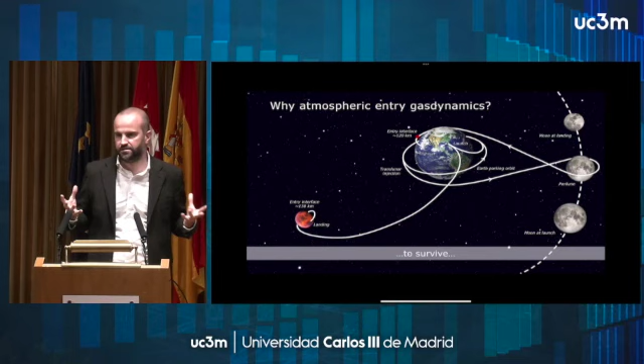This is better. This leads to the fact that we constantly need to validate and assess the quality and the completeness of our answers. Now, why is atmospheric gas dynamics important? Because we want to survive the problem of flying across the atmosphere of a planet, a satellite, or any other object that has an atmosphere.

Here you see we want to go to the moon. Fine, we went there, we want to go back, but then we need to come back to the Earth and be sure that when we are re-entering the Earth's atmosphere, we don't fry the astronauts inside the capsule. But we want to go to Mars. We want to do many more things within our solar system and outside our solar system. And we need to survive all of them.

And if we have an atmosphere to deal with, we have the problem of understanding how to deal with the very high loads that come from very high heat fluxes, very high temperature, a lot of pressure, shock waves, and so on and so forth.

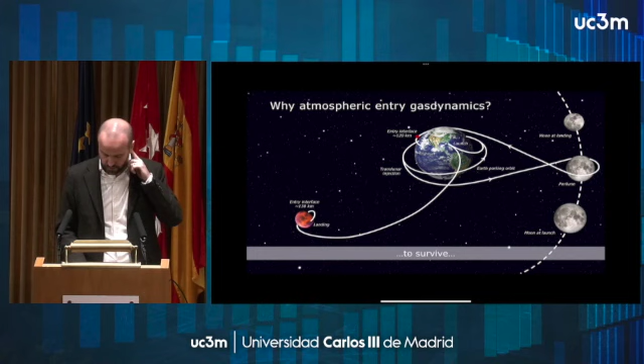But we want to understand it and be better, have better answers, because we want to destroy stuff. So, white and black, right? We want to survive, but we want to destroy stuff.

And this is what we have to do, or one way that we can look at the fact that we have a lot of space junk around our Earth, our planet, and one way of getting rid of those and ensure the sustainable use of space is to make sure that we have a way to get rid of satellites, spacecraft, fragments of satellites or other objects that we have sent out in outer space or in orbit when they reach their end of life.

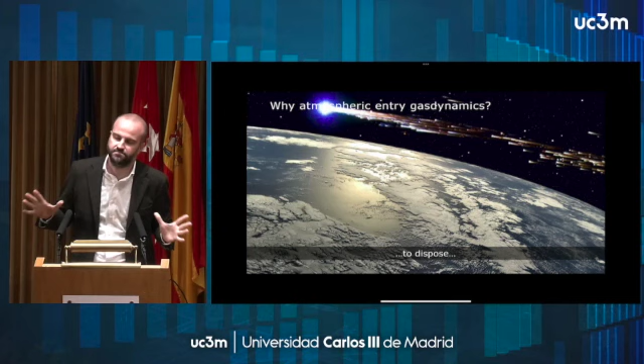And destructive atmospheric re-entry is a way of doing it. So it's a way of picking up a satellite that no longer works, make it re-enter in Earth's atmosphere, and ensure now that the heat fluxes, the pressure loads, and anything that goes on is enough to destroy. Because we don't want fragments hitting the ground, possibly hitting people, and having unpleasant consequences. So that is the why.

But what is what? So what is atmospheric entry gas dynamics? So this is a topic that has been studied for many years, many decades, by many people, many researchers and scientists. And I am not here just to say, this is what it is.

What I want to do here within this seminar is just to, first of all, agree on a little bit of the terminology, the words, the jargon that we're going to use, such that we can understand each other, and to touch some elements of atmospheric planetary entry gas dynamics that are relevant for the type of research that we do in Strathclyde, with the European Space Agency, with other collaborators.

So, I have taken the liberty, which again, it's not a rigorous definition, it's not a theorem, but I've taken the liberty to characterize or to give my answer to what is atmospheric entry gas dynamics as a discipline that has to deal with high temperature, high Mach, non-equilibrium flow physics.

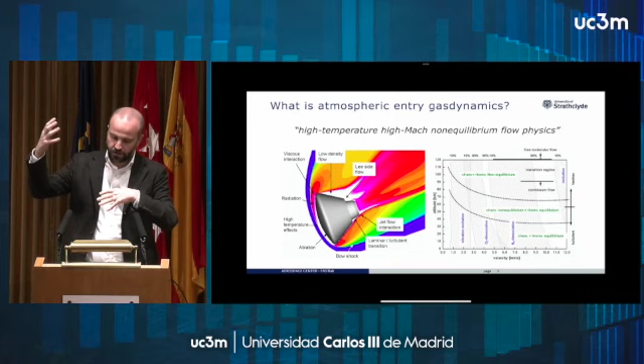So it's high temperature because when an object is re-entering on Earth and is now flying at very high speed, very high Mach number. Now Mach number is not speed, they're not the same thing, okay? There is the temperature, the speed of sound between, but again, let's try not to be too picky and too theoretical now.

The very high Mach and the very high speed triggers a number of aerodynamic effects that induce a lot of aerodynamic drag on the vehicle, and as a consequence of this, there are very steep gradients of a number of quantities, but especially temperature. And so if you go very close to the surface of the object, you have a very high temperature, orders of thousands of Kelvin, okay?

It's high Mach because, again, if we want to re-enter from a planetary trajectory, if we are re-entering from the Moon, if we are re-entering from Mars, we are typically flying very fast. Very fast because, well, you need to go outside very fast, but also because as you approach the Earth, the gravitational pull is accelerating the object. And you want to be sure that that acceleration is not doing you more harm than good.

And it is non-equilibrium. Non-equilibrium for various different reasons, but I would like to mention two, and I will explore more one of the two. There is non-equilibrium because when we are flying in the higher layers of the atmosphere, the density of the gas that is making the atmosphere is low. Or better, the number density, which is the number of particles, of molecules per unit volume, tends to be very low.

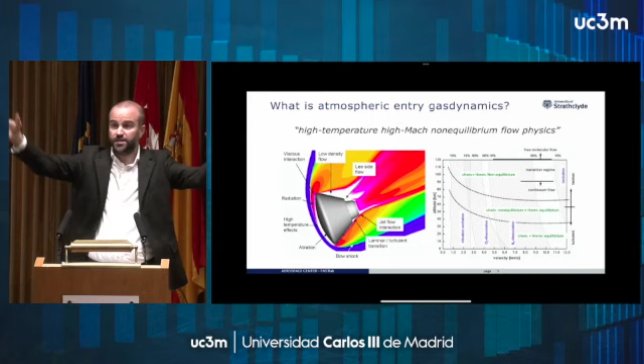Electrons are split away, and you have positive ions, you have electrons, you have plasma, you have MHD, magnetohydrodynamics, magneto-gas dynamics, because then you have electrons moving around your vehicle, and that induces currents, magnetic fields, and that is another very complicated, very multidisciplinary problem.

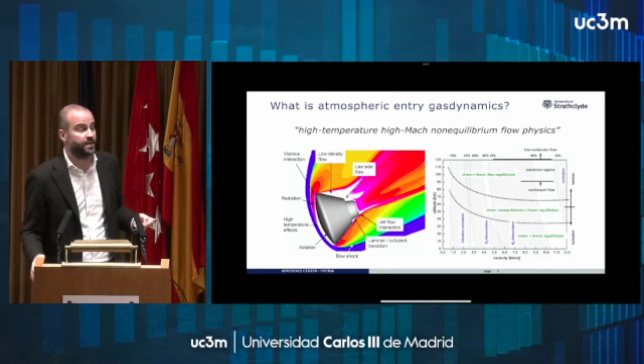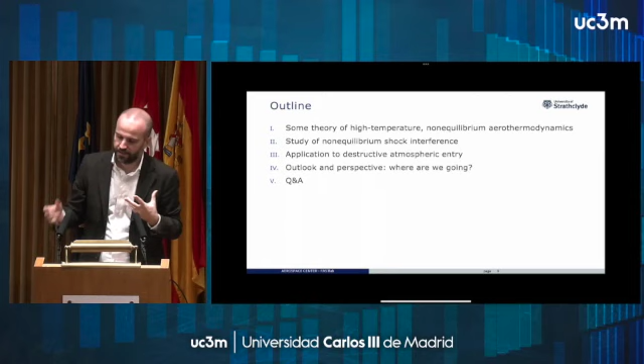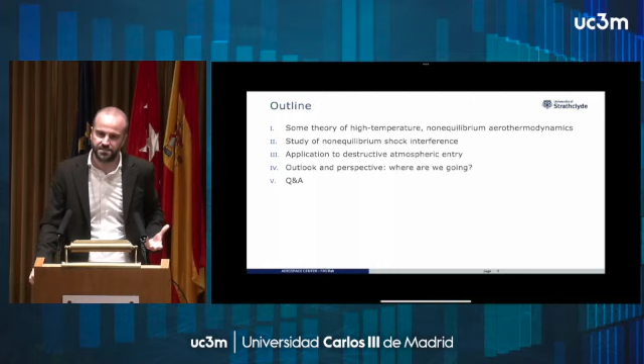And then I will go with part 2 and part 3, looking at two, I would call them applications, but let's say areas where we are studying, in one case, some fundamental problems, shock interference patterns, and in the other case, a little bit more an applied problem, even if that's, again, a terminology, that is destructive atmospheric reentry. And then I will close with a little bit of perspective: where we are going, what are the scientists in the world doing, what are the most important questions that we need to ask now, or is there any question that has an answer, but that answer needs to be improved, needs to be corrected, completed.

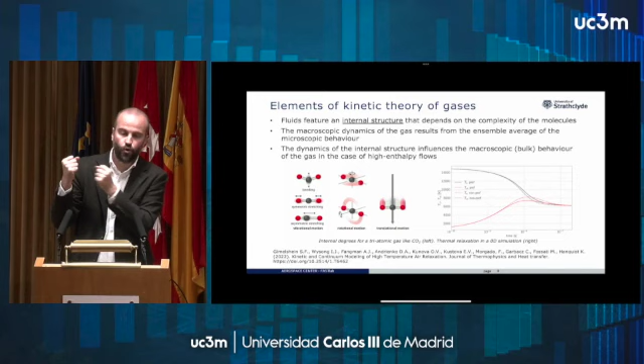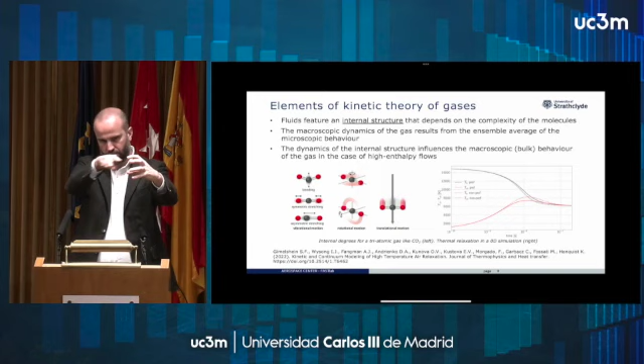So let's start with part one. And I would like to start with bringing your attention to the fact that when it comes to gas dynamics, and gas dynamics in these conditions that we've been dealing with, we cannot neglect the fact that the molecules have a structure. And if you have a molecule with two atoms, O2, molecular oxygen, well, the way energy can be stored in this molecule is different than the way that energy can be stored in an atom of argon, for example. Because we have two atoms of oxygen, one chemical bond, and therefore this object can rotate, okay, but can also vibrate.

And so this idea of having an internal structure of the molecules is what leads to the fact that, when it comes to the internal energy that the thermodynamics books keep telling us about, that internal energy is not only a translational energy of a particle. That works if you are dealing with less complex flows, and each molecule of the gas is a billiard ball, and then you can treat the internal energy just as its translational energy.

But in reality, due to the high energy levels involved in atmospheric reentry, when two molecules collide, that energy has to go somewhere, and it doesn't go only into an exchange of translational energy, exchange of momentum. It goes into vibrational energy. So the molecule starts vibrating as if there was a spring between the two atoms, and it starts rotating. And there is also the fact that we have electrons that make these bonds, and, if we have more complex molecules, surround the atoms with orbitals, and so on and so forth.

And the energy level at which these electrons find themselves depends on the energy that is involved in the collision. And so electrons can change their energy level if the collision is sufficiently energetic. And that's why we need to account for these mechanisms if we want to have a good and accurate prediction of what is happening. And I will show an example of why this is important. What is the difference?

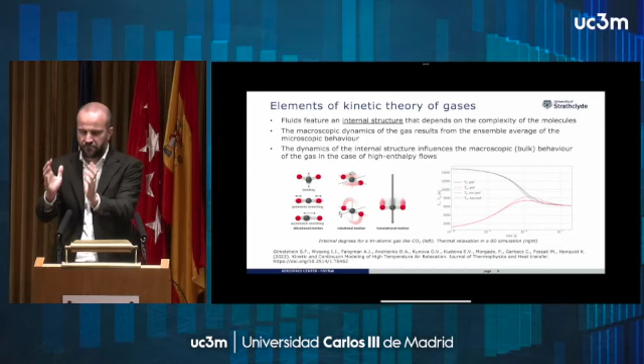What we do to pass from this world, which is the microscopic world, where we have a super focused telescope that looks at the various particles, to the macroscopic world, that is what we feel, because we have a certain dimension, right? Is a bunch of integrations. Now, I'm making it very simple, right? But the point is, you can describe the kinetics of these molecules, the dynamics of these molecules, and then the way you go from there to the macroscopic world, so the classic Navier-Stokes equation, is by making a lot of integrals, complicated integrals of these microscopic quantities. But at the end of the day, this is what you have, okay?

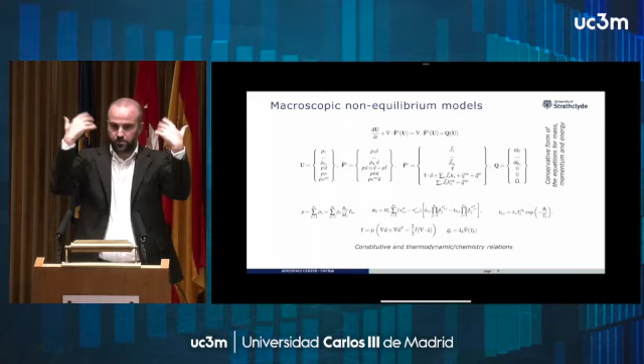And it is very important that we take into account this chemistry, because if you don't, all the energy that would have gone into breaking the various chemical bonds would have been revealed as sensible energy, so as temperature in the gas flow. This means that if we were to simulate the re-entry of the Apollo capsule from the moon without accounting for those, you would have temperatures that are incredibly high, tens and tens of thousands of Kelvin, which is not realistic and would be very difficult to face with the materials that we have now, unless we do something very heavy. That doesn't work as well.

At the bottom part, you have the thermodynamic equations that are needed to complete the set of equations, balance between unknowns and equations. So you have the thermal equation of state for pressure, Dalton's law. Then you have the definition of the source terms. Again, that's chemistry: production, destruction, species, stoichiometric coefficients going on there. Constants of reaction at the very right-hand side.

Arrhenius law is typically what we use, but with Tc, a characteristic temperature that now has to deal with the fact that we have two energies, two temperatures. And so there are functions there. And then below, the classic equations for shear stress and the heat flux for each one of the energies that we have.

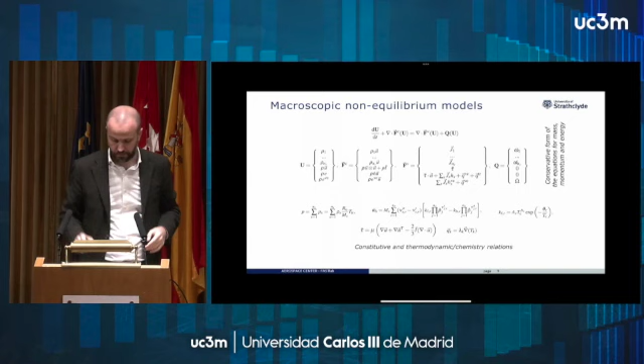Before a certain amount of energy actually goes into vibration, we need to reach a certain level of energy. So if you do not have collisions that are sufficiently energetic, your molecule will not vibrate. And so you can go back to your billiard ball model, because now what matters is kinetic energy, translational energy of your molecules, because the collisions are mild, and the stiffness of the spring in your idealized harmonic oscillator model is too strong, so it really doesn't move. There's no appreciable energy there.

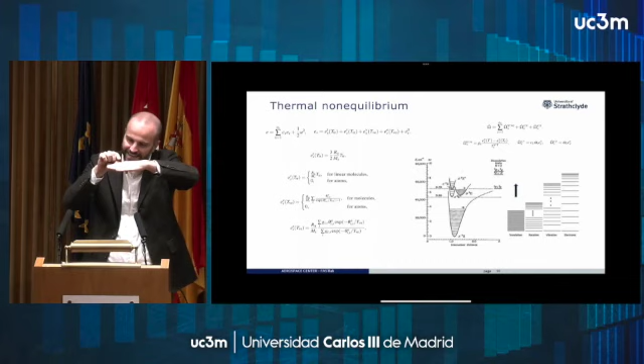So there is a sequence of events, and that is why we tend to go with a two-temperature model, because we say, look, translational and rotational tend to reach equilibrium very fast. You see, all those energy levels are very close, so there is the need of a very small amount of energy to go from one level to another, and that reaches equilibrium relatively fast.

That is not what happens, for example, with vibration. You need to go with much higher levels of energy. And if you don't get the right packet of energy, you don't go there, okay? And this is an important aspect that I will use later on.

Questions? Maybe I don't know if there are questions now. Okay, so that's the theory done, so you can relax. Now it's just colorful images. And we can go ahead with this.

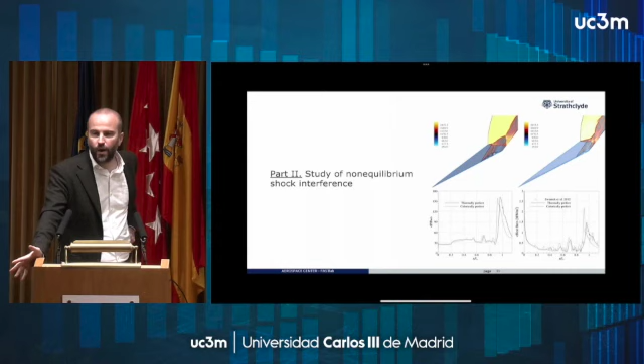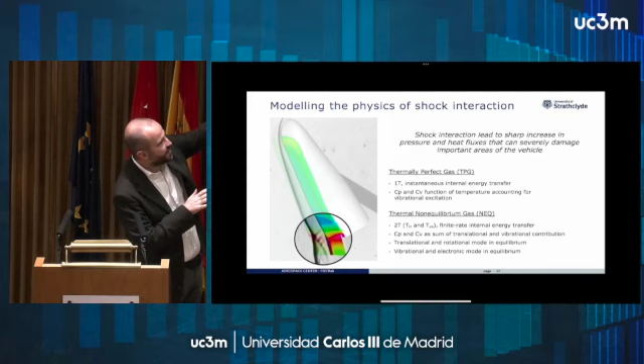So the first thing I want to show you is some work that we have been doing in trying to define the way shock waves interact in non-equilibrium conditions. Why is this important? That's one example, one of the many, because you might have somewhere locally in your re-entering object the presence of multiple shock waves, maybe some generated by the nose, some other generated by a control surface that is now activated and deflected and so on.

And the outcome of this mechanism of interaction is important to be understood well. First of all, because it's important we understand things, that we advance knowledge. But it is also important because you don't want to have an increase in pressure or an increase in heat flux so high that will destroy your control surface. If you destroy your control surface, if you destroy your thermal protection system, your astronauts will become Kentucky Fried Chicken. You don't want that.

Okay? And here I have made the statement about two different models that we may want to consider. The one at the bottom is what I have been annoying you with before: two-temperature model, multi-species, finite rate chemistry, and so on. The one above is, I would say, the most immediate step after the classical Navier-Stokes equations. And let me open and close a parenthesis here.

Whenever I talk about Navier-Stokes equations, I intend mass, momentum, and total energy per unit volume conservation. There are people out there, and I'm not saying it's right or wrong, I'm saying that's the language I use, who say Navier-Stokes is just momentum, because they think it's incompressible, so mass is an incompressibility constraint, there's no thermodynamics, and we just deal with momentum. Okay, fair enough. I talk about Navier-Stokes as the full set of 5 equations in classical fluid mechanics, which is incompletely parabolic for those who like mathematics. But we can talk about this later on.

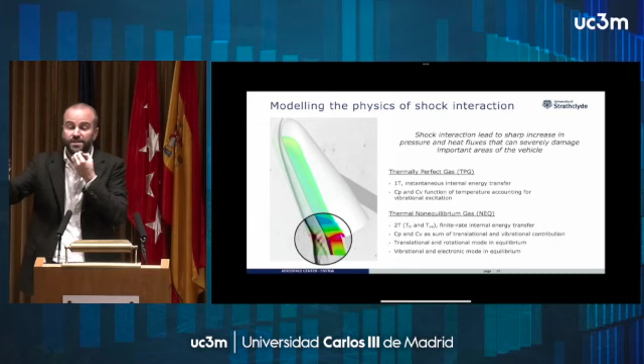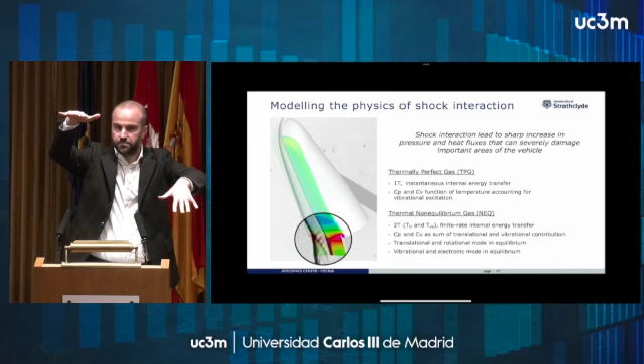And this is a first approach you can use to introduce the fact that the molecules have an internal structure, because the change in CP is a consequence of the activation of the internal degrees of freedom. So you are populating vibrational modes, electronic modes, and so on, in a way that is in equilibrium with respect to the translational and rotational ones. And what we want to do is essentially this: we want to be able to define a schematic for the different types of interaction between shock waves.

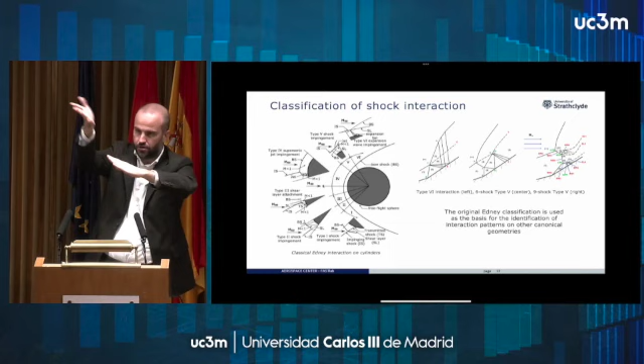Everything started in the 1960s with a guy called Edney, who studied the interaction of an oblique shock with a bow shock in front of a cylinder, and noticed that if I change the location at which the oblique straight shock interferes with the curved shock before the cylinder, the outcome of this interaction is very different. And he found out 6 different types of interaction.

Some of them are more simple than others, but the ingredients are that you have shock waves, you have shear layers, so layers of fluid that move with different velocity, and there is a shear. There are contact discontinuities that are the ideal counterpart of shear layers. There are rarefaction waves, there are supersonic jets, and so on. And from that seminal work, people have applied that to double wedges and other configurations, such as double cones, and that's what we want to do.

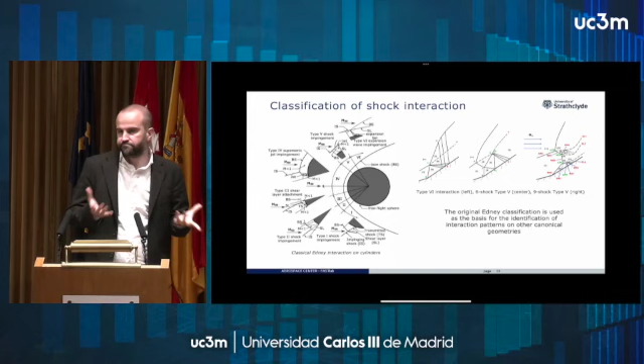We want to be able to identify schematics like those that you see at the top right for a wide range of different types of interaction. And what we did was to focus on CO2. Why? Well, because it's cool. Because it is the main constituent of the atmosphere of Mars.

So Elon Musk should write us a check for this, but he doesn't.

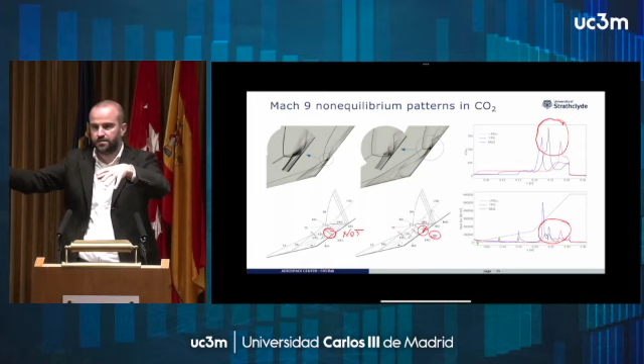In the thermally perfect gas, there is no concept of translational and rotational getting to equilibrium before the vibrational one. So when we have a shock wave and we have a thermally perfect gas, all the energy is immediately converted and equally distributed throughout the entire internal modes. That's not what happens in the case of a non-equilibrium model, because you have first energy going into the translational and rotational modes, and then after a relaxation process, you hit the vibrational one.

What does that mean in practical terms? You have a shock wave that you don't have in the thermally perfect gas or in the perfect ideal gas. You have different peaks in pressure and heat fluxes. And so if you look at the black line on the rightmost side, the non-equilibrium gives you the highest peak in pressure, and the shock wave I'm talking about is responsible for this jump here that is not present in the other two.

And what you see, interestingly enough, and hopefully likely, is that the peak of heat flux is much smaller than the one you will have with the thermally perfect gas. So if you were to design a spacecraft and use a thermally perfect gas model, you would have to make your thermal protection system much thicker.

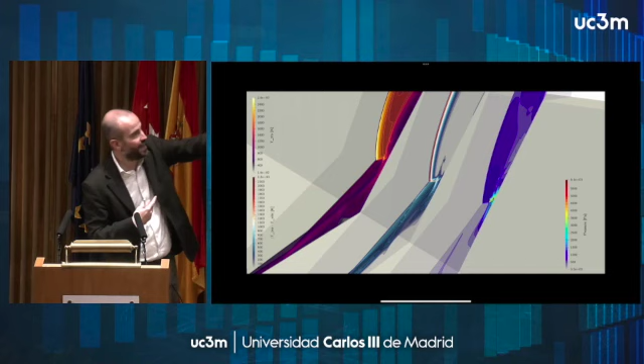This is a colorful image just to show you the level of non-equilibrium you have in this type of flows. The leftmost slice is translational temperature. The center slice is the non-equilibrium effect, translational temperature minus vibrational temperature. Wherever there is no color, there is equilibrium. Wherever you see colors, there's non-equilibrium. And the one at the right is just pressure, because we like pressure. You can see that for this type of flows, there is a lot of non-equilibrium going on that you will not be able to reveal with a thermally perfect gas model.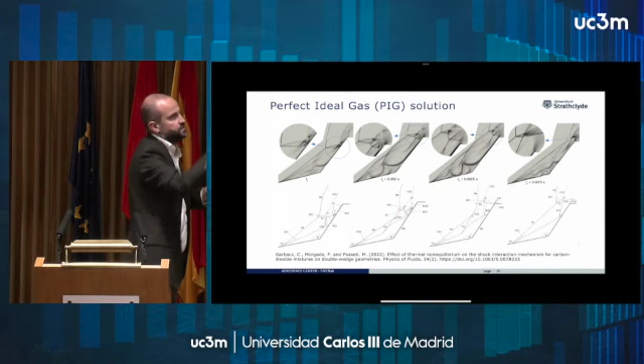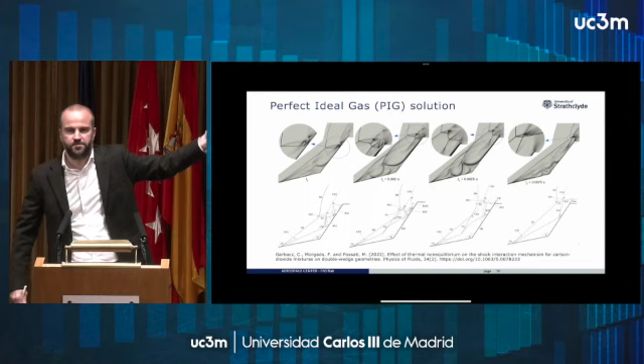I will go very quickly here. This is what you would have if you were to use a perfect ideal gas model, billiard balls, constant CP, constant CV. You would have an unsteady flow, while in the previous cases the interaction was steady state. In this case, the interaction of the shock wave gives rise to a very large separation bubble, with shock waves moving back and forth, vortices moving, and one may say, well, this is a very interesting, very important mechanism, except that it's wrong. So you can use it just to show colorful images, but don't use it to do any design or any study.

So these are the key findings that we have observed when using this non-equilibrium model with CO2 mixtures. And again, go back to the fact that we are now interpreting correctly the mechanism of energy exchange with a molecule that is CO2, so it's a triatomic molecule. So it's a little bit more complicated than what we saw before. I will not read it, but I will just leave it there for you to have a quick look, and we can chat about it later on.

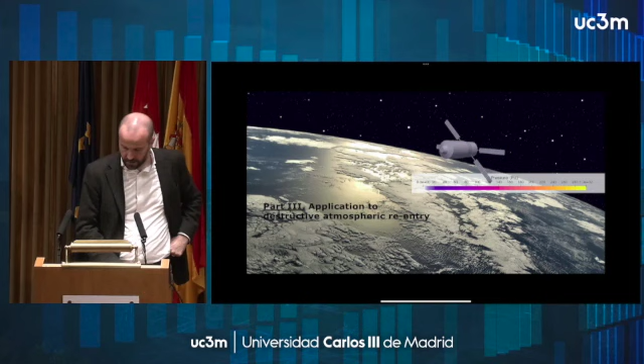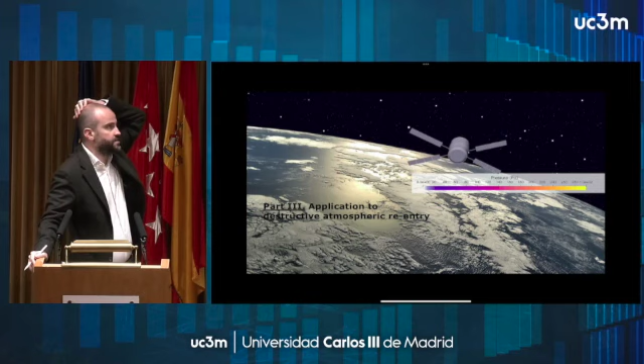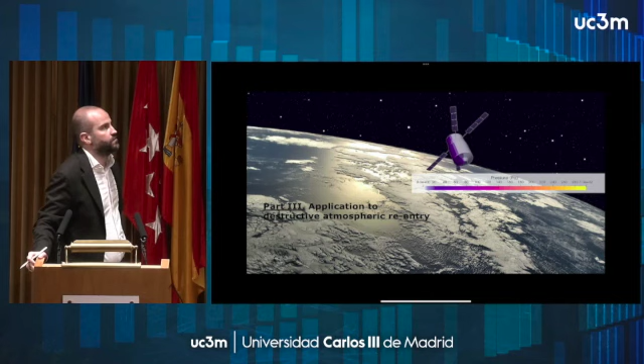This is the second application I want to show you. Now here, differently from what we've done in the other case, the interest of people that work with me is at this stage developing methods. Okay, so we are developing a computational framework to simulate the destructive atmospheric re-entry of a satellite. And the simulation that you see there is a real one that we did.

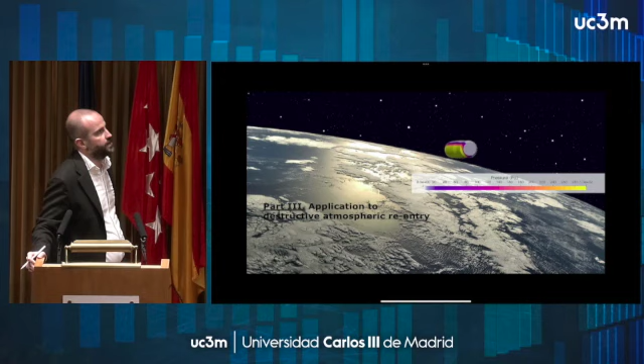Solar panels are gone, and then you let it go for a little while, and you'll see that the cap will go away, because now the pressure and the heat fluxes are destroying a number of things. So how did we get there? We get there by starting from the problem that this is, as I was mentioning before, a very challenging task.

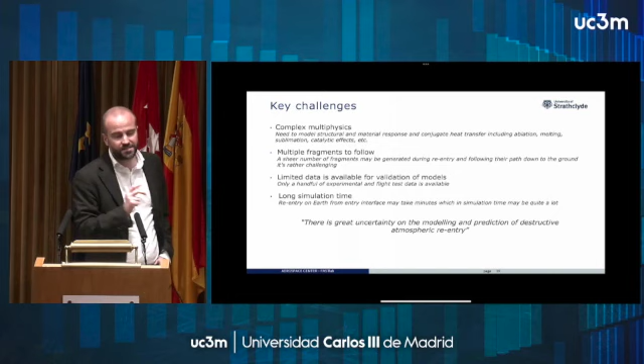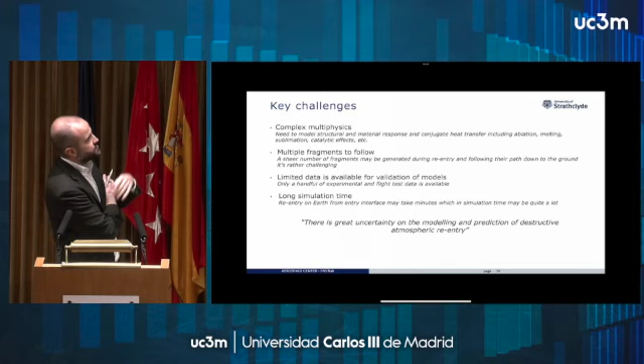It's multi-physics, there are many disciplines, the time scales that are involved in this process are very wide, and so there's a broad range of problems that we need to address. The simulation time tends to be very long. If you want to have a good degree of accuracy, you need to go with high fidelity, and running all those high fidelity simulations takes time.

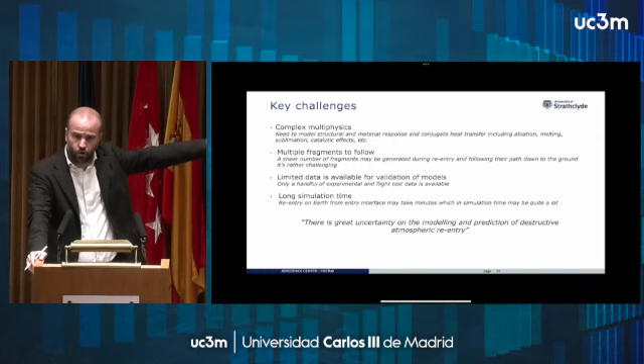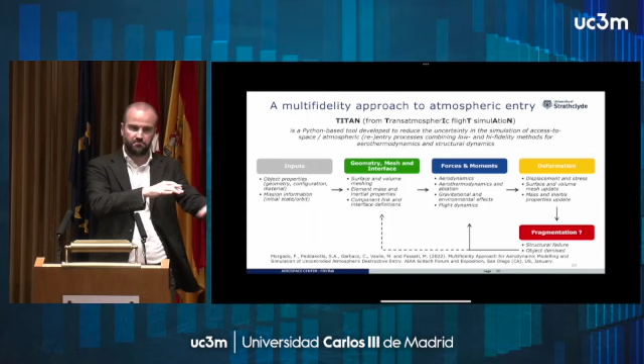And so our approach here has been to try to reduce the uncertainty that goes with this type of simulations, with the aim of improving our ability to say, look, if this object is re-entering, you have to be worried about that specific area down on Earth, because that is where the fragments will go, by developing a multi-fidelity approach that brings together low fidelity, fast, but less accurate models with high fidelity, very accurate, but a little bit costly, in simulating everything that is going on.

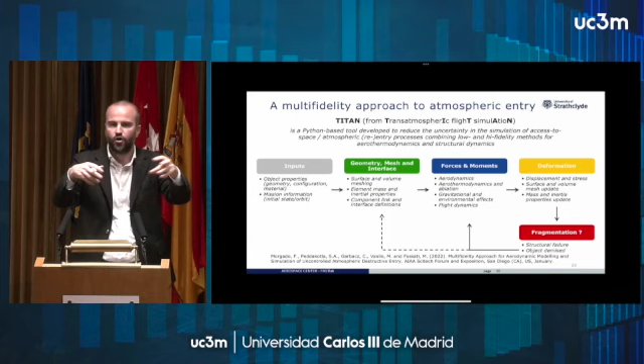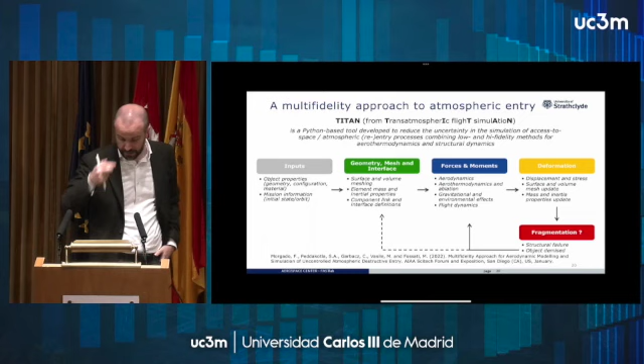From the aerodynamic forces and moments, the aerothermodynamically induced heat fluxes and plasma, to the structural part of things, so how the object deforms and eventually breaks, up to the point where we are following the dynamics with 6 DOF, so we have 6 equations for the dynamics, Newton's forces, moments, accelerations, moments of inertia, and so on. So we have a tool that is called Titan. It will be released open source very soon, so stay tuned.

But what I want to do is to give you a little bit of a flow chart about the aerothermodynamic part, because my background is aerodynamics, right? So I don't do structures, I don't know what they are and how they work. But this is a little bit the way the code is organized.

And if we look at the high fidelity part, there is also the aspect of dealing with the computational mesh, with the need of refining the mesh to improve as much as possible our accuracy without spending too much time simulating over very refined meshes everywhere. And here we are trying to go ahead with the open source mantra, right? So we are trying to use everything open source to make it something useful for the community.

We are using a code called SU2-NEMO. We have been developing it together with the friends at Stanford and VKI and Arizona for the continuum and slip regime, so lower layers of the atmosphere. But when we want to look at the higher layers of the atmosphere, when the rarefied regime is a little bit more intense, we go with a code called SPARTA. It's by Sandia Laboratory. All of this is brought together with some tools to do the structural mechanics. FEniCS, it's another open source tool, and all is integrated together and works.

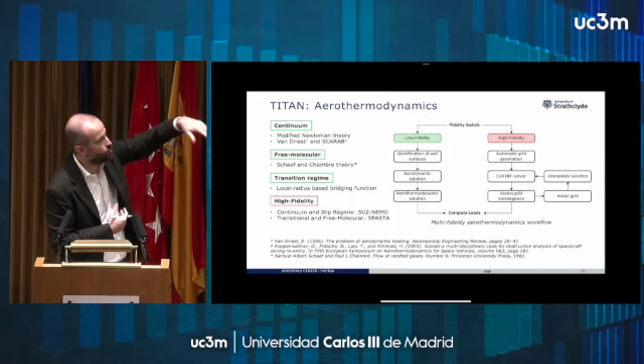So what I want to do here is just to show you how much difference there might be in going from one method, low fidelity, to another one, multi-fidelity. This specific case is a real case, right? So this is an ATV cargo, a real European Space Agency vehicle. This is a simplified geometry just for the sake of a proof of concept.

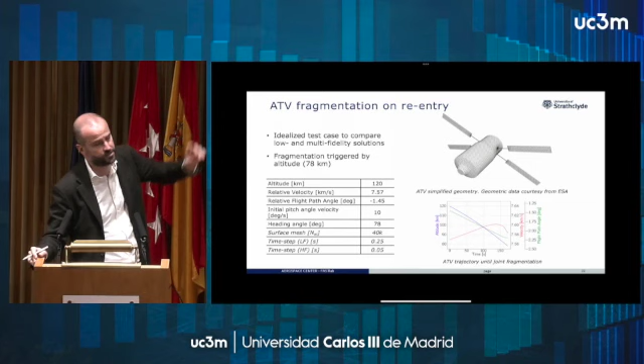These are some of the conditions that we have, and here on the right you see a little bit the trajectory of the main tank, the main cylinder that you see there. So what we did is, okay, this is not going to show very nicely here, but I will try to make some notes here.

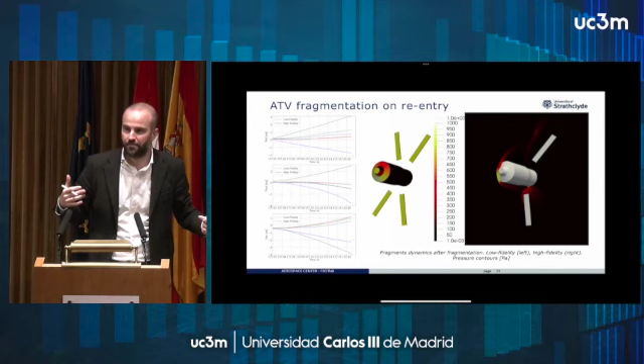So the central animation shows you the fragmentation of the panels with a low fidelity method. Approximate method, very fast, you can get solutions in seconds, if not minutes. The right one is the exact same conditions, but with high fidelity. You see immediately with your naked eye the difference in the dynamics of the solar panels. And that is going to be massive if we now consider many more fragments, the possibility that they collide and that they go and change the overall trajectory.

Here, those, I guess now not very clear graphs show the differences in the attitude, so roll, pitch, and yaw of each one of the panels between low fidelity and high fidelity. Now, I know this is very difficult to read. Probably I could share the presentation and this will be more clear with everyone.

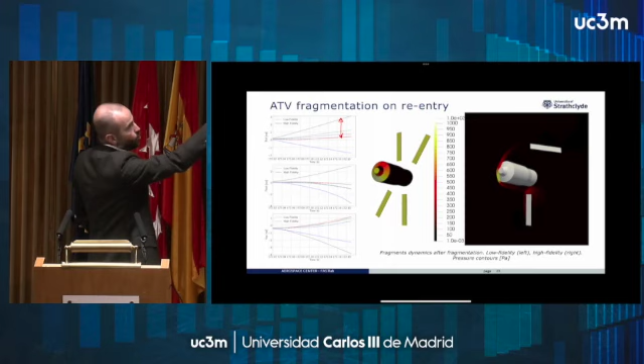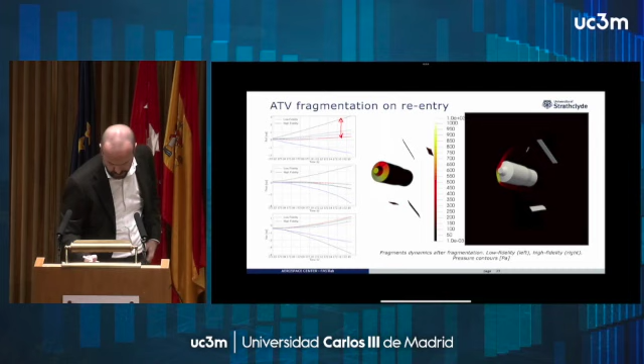But for example, if you look at this arrow here, this is the delta in terms of radians between the rotation around the roll axis of the solar panel between low and high fidelity. Okay, and there are differences that are similar in the other cases. So now, if my eyes don't fail me, you go approximately from 2.5 close to 0, so 2.5 radians, which is not that negligible.

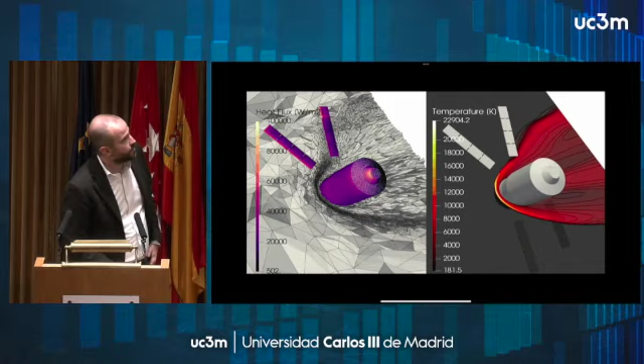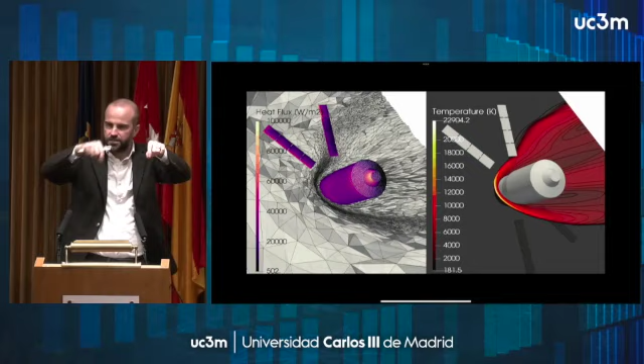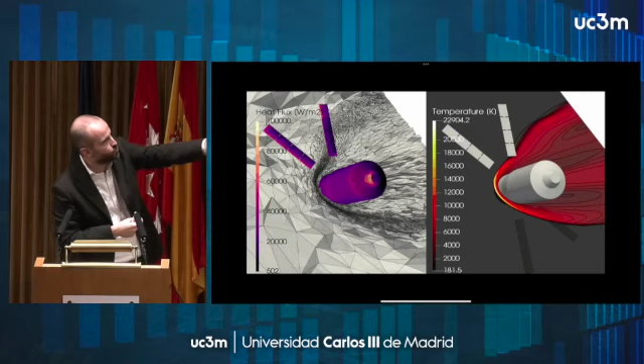Of course, everybody would like to go and do high fidelity simulation like this one. So this is the same object now with a more detailed structure of the solar panels. We have solar arrays with joints that connect them, made with their own material. And you can see here an example of the importance of using mesh adaptation, right? Because that will allow you to reveal and capture the shock wave that is generated near the body and that will impinge on the solar panels, being the major reason for the solar panels to bend and break away.

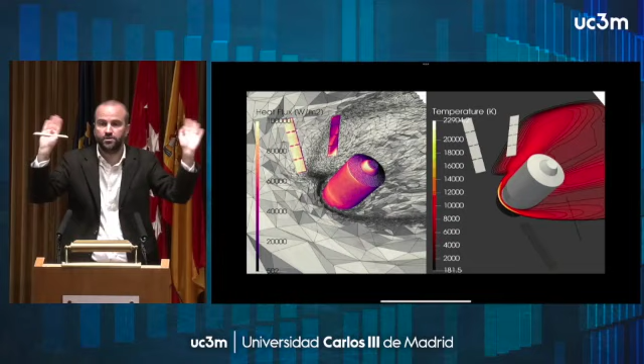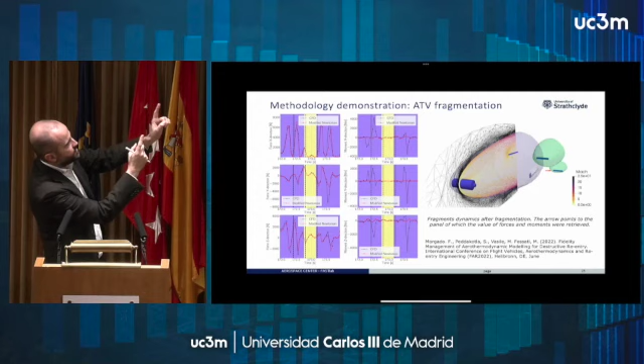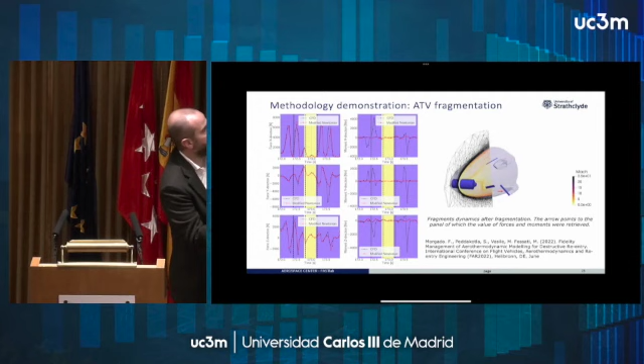Here is the multi-fidelity result. Okay, so what you see here is a number of lines that look at the forces acting on the various fragments that you see there being broken. And what you see in terms of comparison between the purple line and the yellow area is that some of them are done low fidelity, the other one is done high fidelity. So you see that the purple one is low fidelity, the yellow one is high fidelity. And you could see the discrepancies between the low fidelity and the high fidelity solutions, forces and moments, by comparing the lines.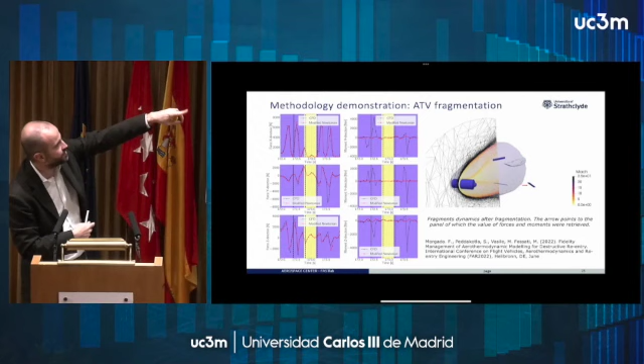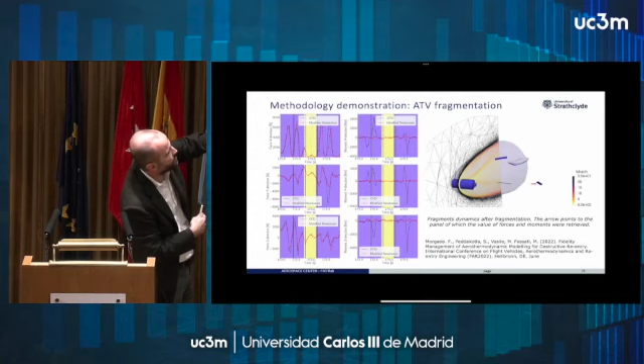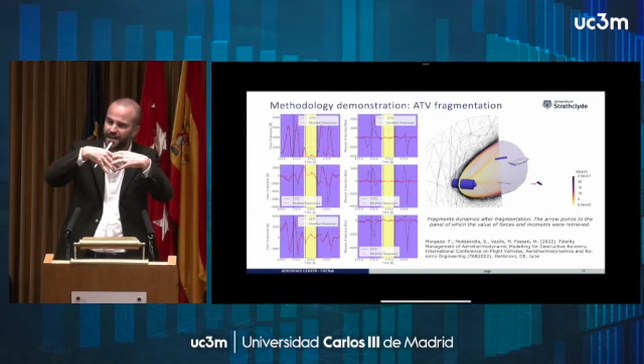And what you observe here is that, of course, when you are in the high fidelity, there is only one line, that is just the CFD one. It's okay, it's fine. But when you go outside, you can see that there are substantial discrepancies. And these discrepancies arise when the objects are complex and there is shock wave interaction between the self-generated shock wave and the solar panels. But when an object goes away alone, and therefore doesn't feel anymore the influence of the other shock waves, then these plots show you that low fidelity methods are not that bad. And so the forces and moments are quite okay. But there has to be no interference within the shock wave.

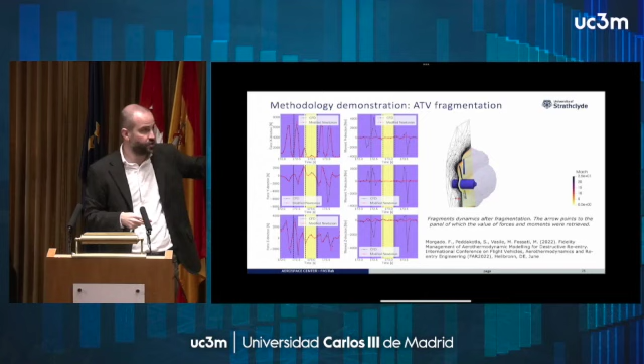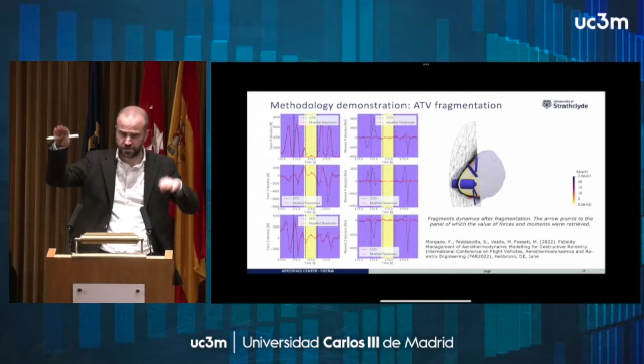And so this multi-fidelity approach is capable of automatically identifying the existence of such an interaction. And if such an interaction exists, then you go with high fidelity. Wherever you see the colored mesh and so on, that's high fidelity, because there is the interaction between the main body, the solar panel in the back, and so on. But whenever something goes away and is now alone, by itself, then you can go ahead with low fidelity, and that works relatively okay. Of course, it's a trade-off, right? You would like to go always with high fidelity, but you can't. So you have to find a compromise.

So, final part, am I right with timing or late?

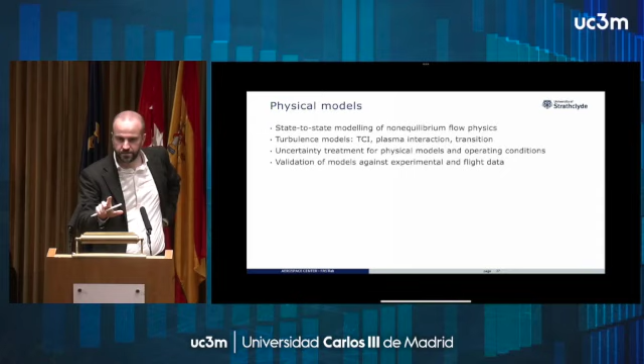It should be, okay. Okay, so this outlook and perspective is split into 3 categories: physical models, numerical models, applications, okay? So this is a list of what are, right now, as we speak, the most hot topics in the physical modeling part. I don't want to talk about turbulence.

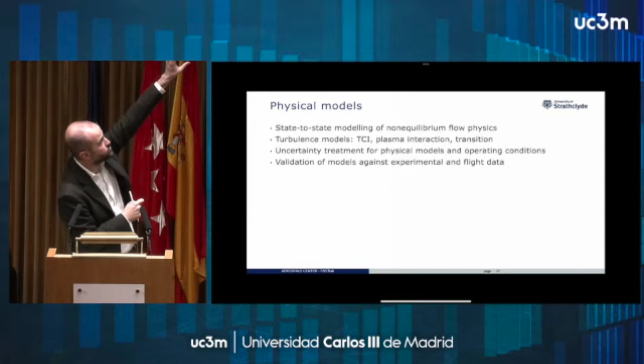Everybody in fluid mechanics says that turbulence is important, and it is. And it is even more so when we look at these very complicated flows. When we look at the interaction between the plasma that is being generated near the object and the turbulent structures, there is a scattering of certain frequencies and electrons, and that has an impact on radio frequency, how you detect things, how you communicate to the astronaut. But I want to spend a couple of words about the first one.

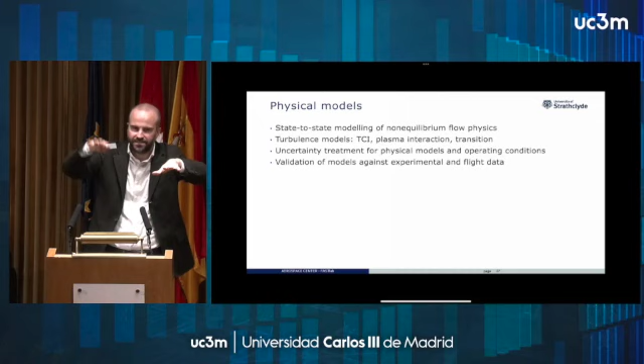This is a recent project that we have with ESA that just started to introduce an even more accurate way of modeling the non-equilibrium processes by doing state-to-state modeling. So all those quantized states that identify the state of the various molecules and atoms in your gas can be modeled accurately by state-to-state. It's a very costly, very expensive simulation, but that's the way people are going.

Numerical modeling, well, I haven't spoken quite a lot about numerical modeling. It's boring, it's mathematics, but I just put this here because I think it's important that we have a little bit of idea of what is happening. And so we are looking at essentially three major categories. We want to increase the numerical accuracy of our methods: DG, discontinuous Galerkin, higher order schemes. That's fine. A lot of problems with oscillations near shock waves and so on and so forth.

But we want to go on the other side of the spectrum, having very low fidelity methods that we can use to make fast predictions of these complex flows, such as data-driven methods, machine learning, artificial intelligence, physics-informed neural networks. That's what people have been doing now. The last one is uncertainty. Uncertainty treatment for the numerical methods, right? So it's called epistemic uncertainty.

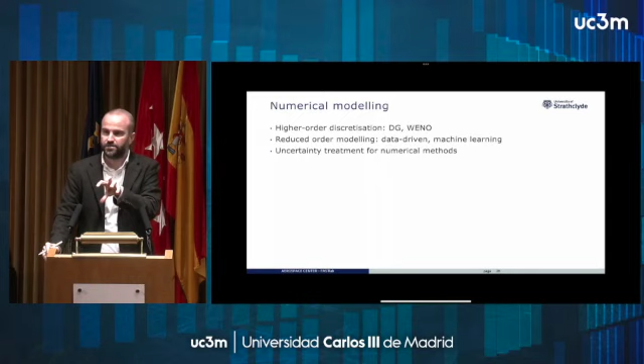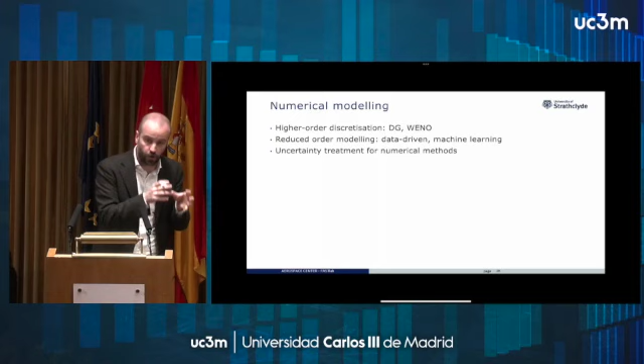Now, that looks at the fact that no matter how good you are, your numerical model and the way you solve the equations that result from your numerical model are wrong. I'm exaggerating, of course, but there is an error there. And so you want to be able to quantify that error.

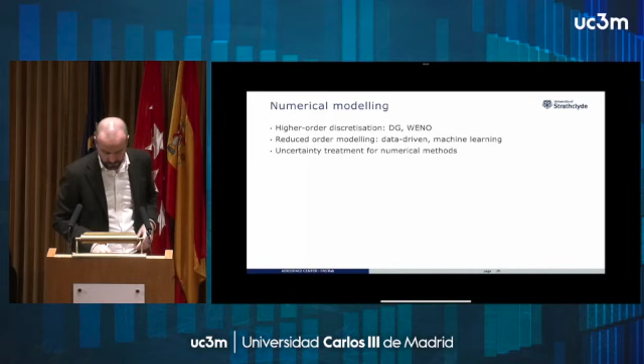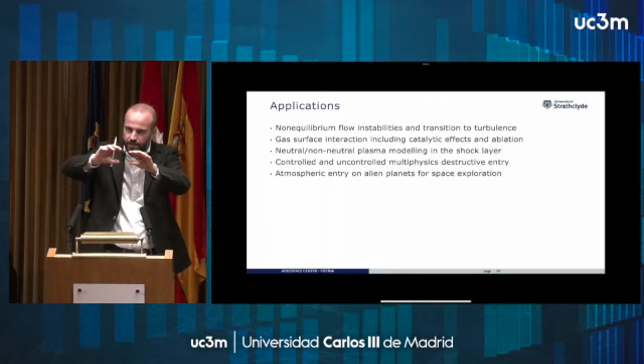In terms of applications, well, there are many. But here I have identified some that are among the most exciting, where people are now really looking. Again, fundamental mechanisms such as the first three, non-equilibrium flow instabilities. A shear layer in non-equilibrium flow, whenever it gets to be unstable, is one of the drivers of the transition to turbulence.

So if you have a nice shear layer that stays there, maybe thickens a little bit because it's non-equilibrium, but it stays there, it's fine, we're okay. But if that starts becoming unstable, Kelvin-Helmholtz instabilities and so on, that may lead to transition to turbulence and increase of heat fluxes, increase of shear stresses, and everything.

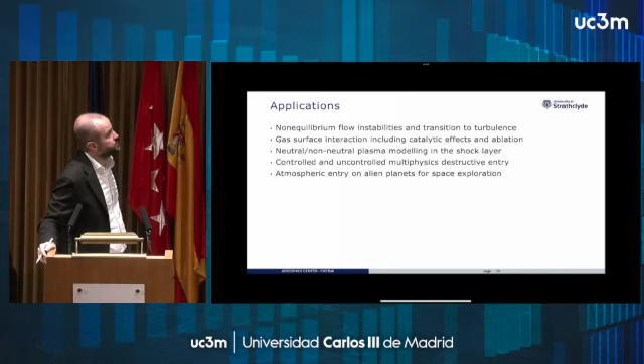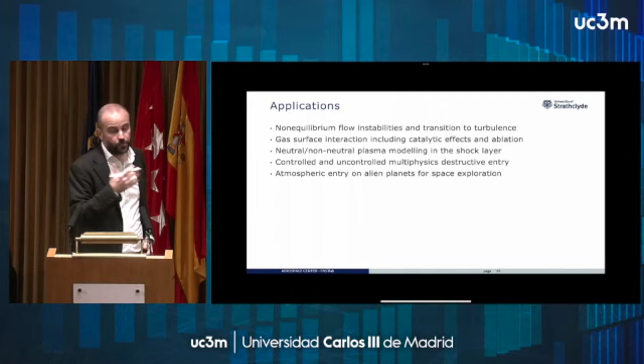All to go to the two very interesting, very exciting applications about destroying something, either in a controlled or uncontrolled manner, or surviving something, surviving the entry in alien planets, or your probe surviving that you are sending, for example, to outer planets.